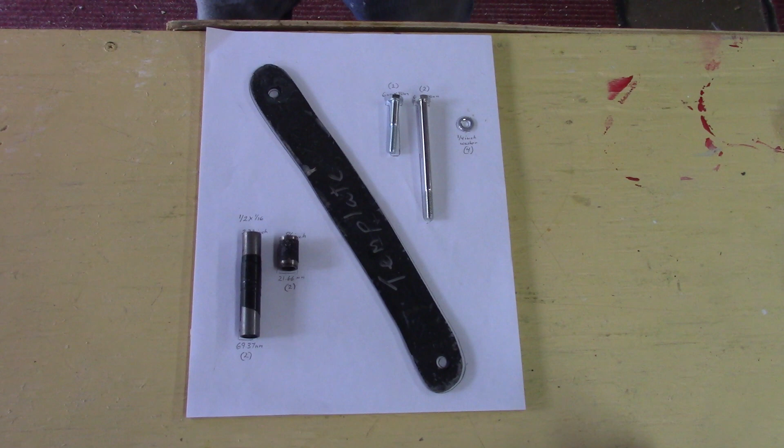The time has come that I'm no longer going to be making the door pull braces for the 4G Eclipse, various reasons for that. But since I'm not doing it anymore, and I know there's still people wanting these from time to time, I thought I would give y'all everything you need if you want to make your own.

So right here is just a picture of everything you're going to need. Now you're going to need 2 or 4 of a couple of the things on it.

This is the template for the brace itself. You're going to need 2 of these. I've got that drawn out on the paper, and what I'm going to do is scan it as a PDF and put a link in the description of this video where you can pull this PDF file and print it out yourself.

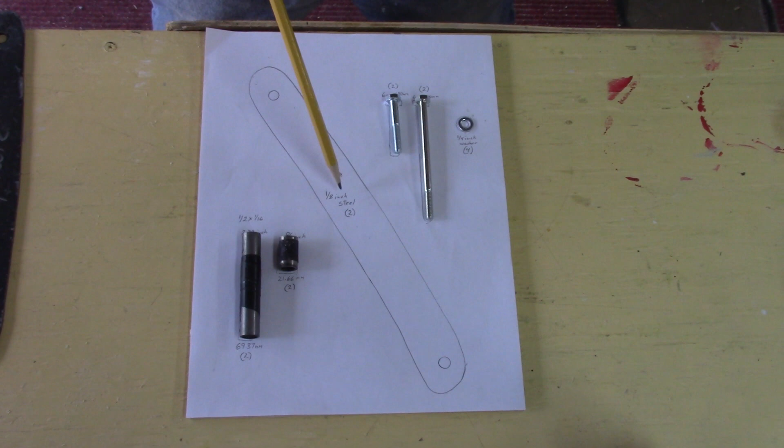So the brace itself is made out of 1/8 inch steel. You're going to need 2 of those. Now they are a mirror image, so one side works on the other, so basically you need 2 of them.

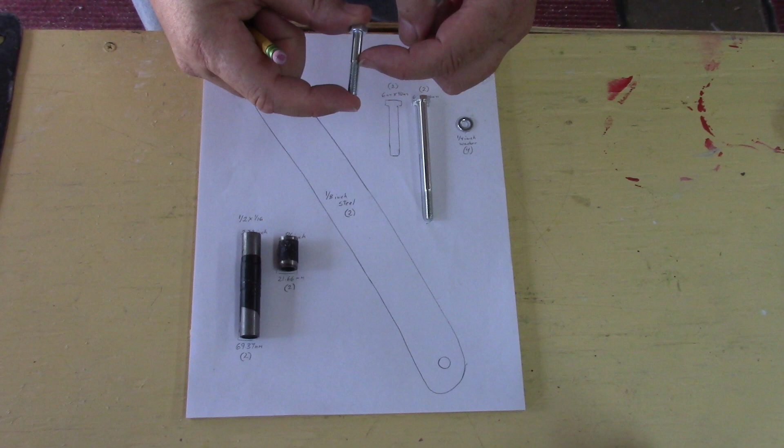You're going to need the bolts to mount the thing, you're going to need 2. These are 6mm, now they have a 10mm head, okay, but they're considered 6mm because it's measured by the thread. So you need 2, 6mm by 40mm long. Sorry, I got to stay in frame here.

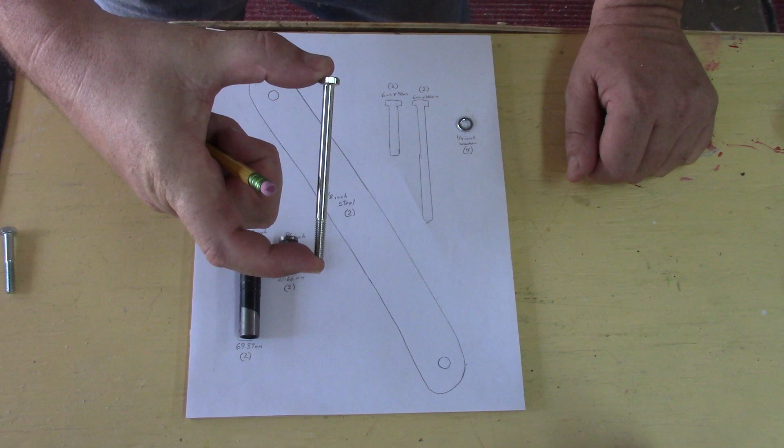And I have seen these at Home Depot, okay, they're not cheap, 75 cents, $1.50 a piece, something like that. But you can get them at Home Depot, Lowe's, in their specialty stuff. You're going to need 2 of the 6mm by 100mm, so it's 100mm long. You're going to need 4, kind of hard to see here, 1/4 inch washers.

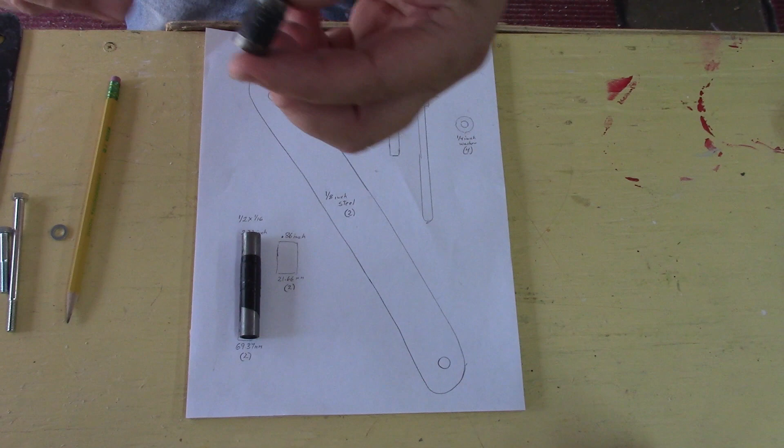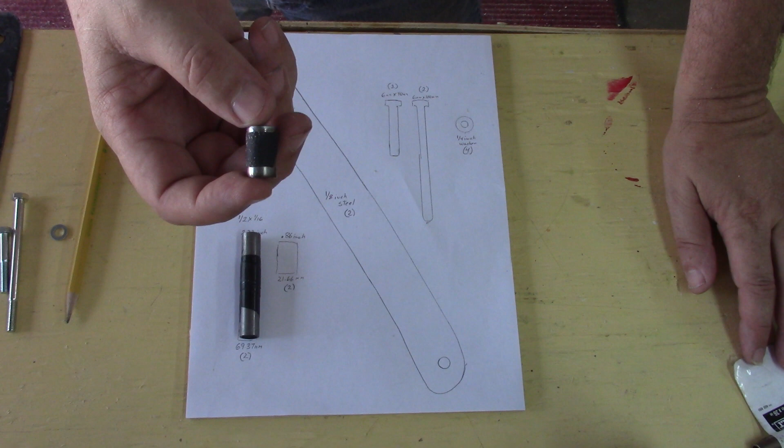Now these you're going to need to make yourself. Here's, I just buy a rod, there's the tag still on it from, I think these are from Home Depot. But anyways, it's 1/2 inch by 1/16 inch wall. They come in 3-foot lengths, I think, for like $5 or $6, I don't remember exactly what it was. It's in their round tube section where they have all their flat steel and stuff.

So anyways, you're going to need 2 of these cut to 0.86 inches or 21.66mm. I've got all this stuff written down on this so when you print out the PDF.

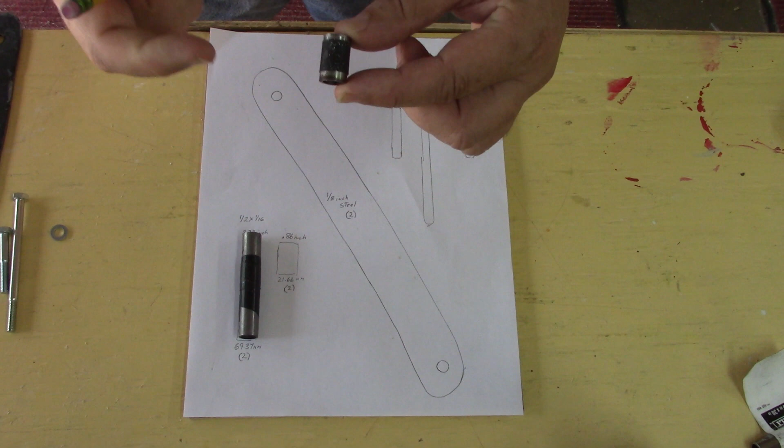If you make them shorter, when you bolt the brace down, it's not going to lock it in properly. You'll get a little bit of rattle, or it'll bow it. If it's too long, your cover won't snap on. So get as close to that as you can.

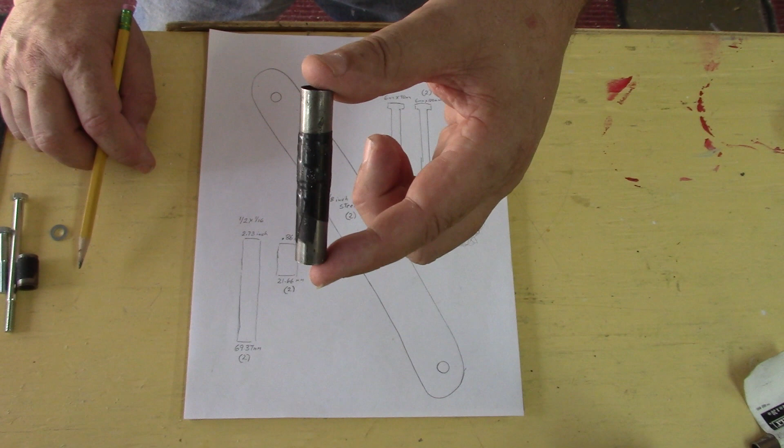Then you're going to need 2 of them that are 2.73 inches long or 69.37mm, okay.

So this is everything you need. I put little drawings in there. Now these aren't to scale, this is correct, okay, but the other is just representations and tells you what you need of them.

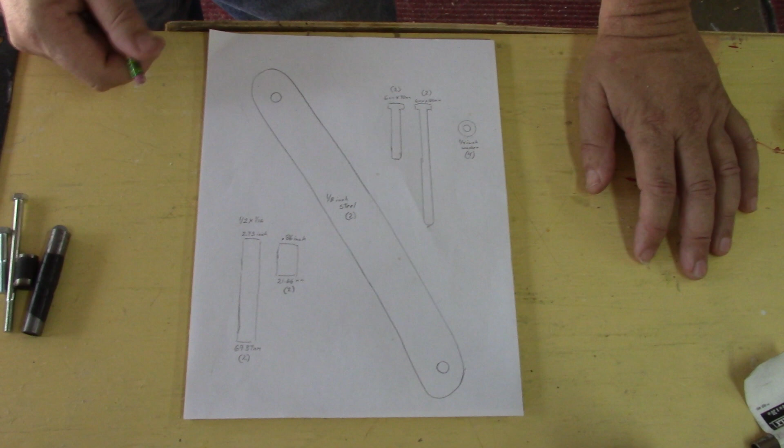So anyways, I still have the video up there on how to do the install, so that's all going to be up there. If y'all cannot find these bolts, hit me up.